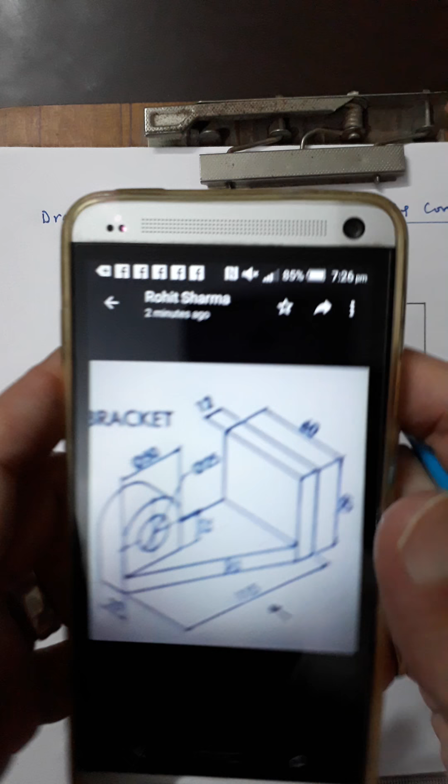So in the top view, you will see a 115 mm dimension. What is this height? This is 60 as well. So this is also 60, so 60 is the depth. Again, 60 by 115 you can draw.

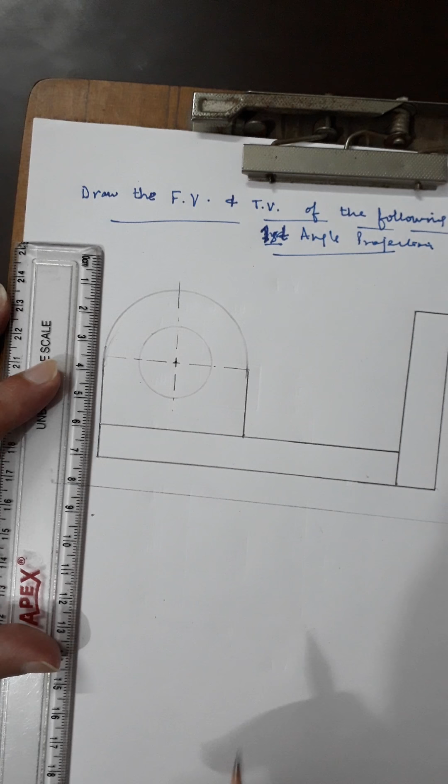Okay, first I will take the projectors throughout. I will draw the projector lines throughout, and yes, I will take 10 mm away from the XY as well.

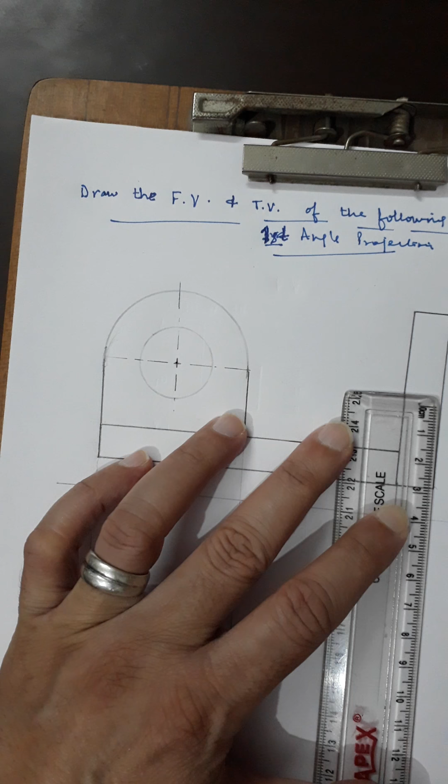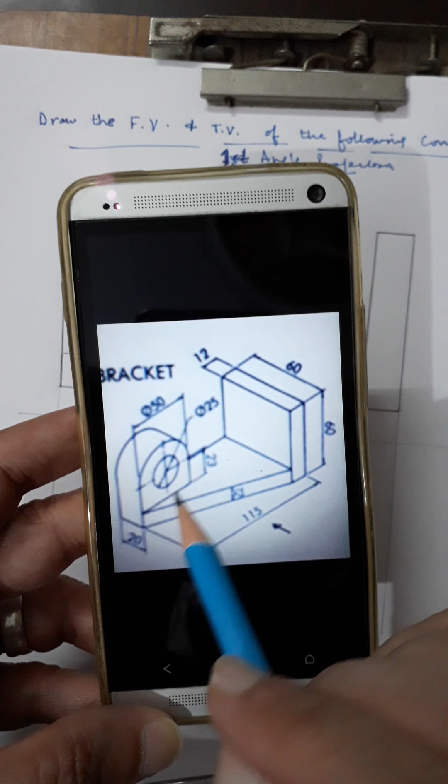Okay, so these are the projector lines. Yes, now you can see these are the vertical projectors. Now what will be there? You can see in the top view, this rectangle is visible, then this inclined wedge is there, then this circular hole is hidden and will be shown as dash lines.

Okay, and this slot will be visible. That is the outer diameter 50, visible. Now what will it be?

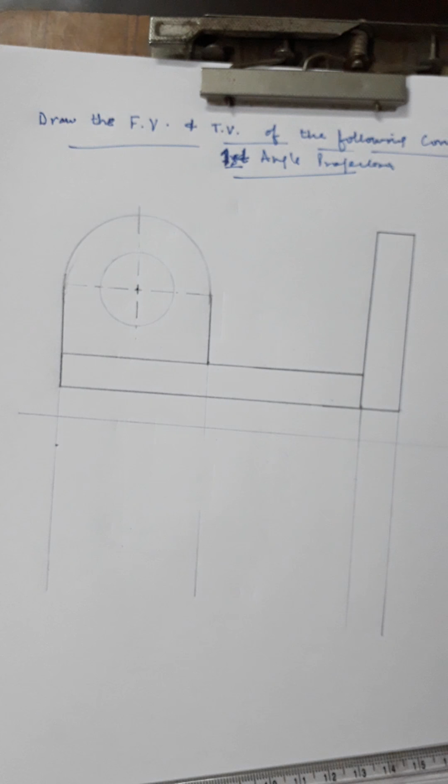Now I will first draw this, starting from here, the right side rectangle. It is 60 by 12. Okay, I will measure, first I will draw this.

Whatever it is, 115 is given, and you need not measure the length because you have already drawn this vertical projector, so need not measure it. And then it is 60 by 12, so you can mark it 60.

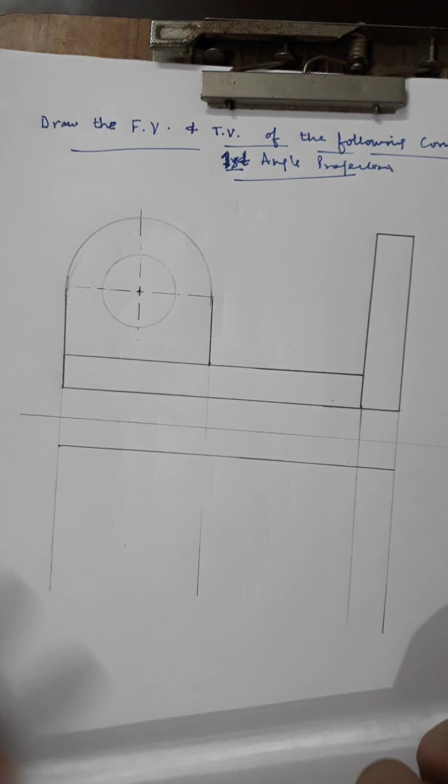This is 60, and this is 12 already there. So that is the benefit of drawing these vertical projectors - you need not measure the dimensions.

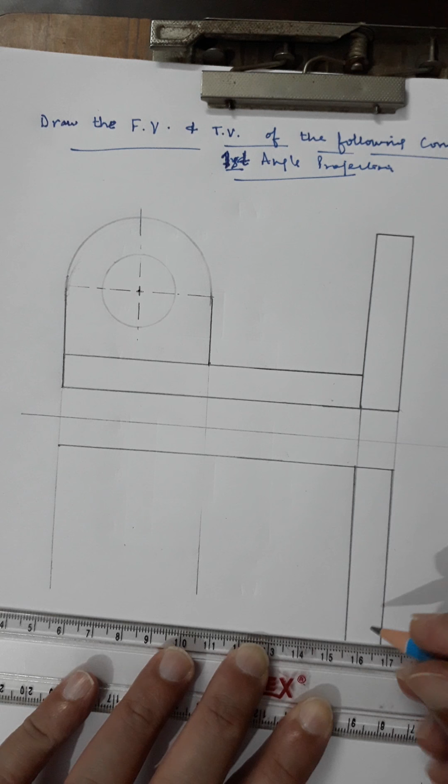Now you can join this, and now you come to this left side portion. You can see this is 20, it is 20 here. Okay, you can mark this 20, so it will be 20.

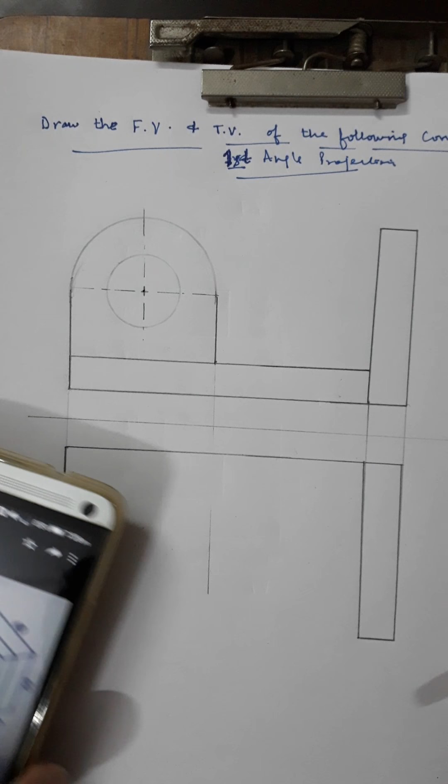Okay, and up to this 50, it will be a rectangle shape, this 50 from this left side corner, so it will be a rectangular shape, because in the top view the circle will be a rectangle, whereas in the front it is a circle.

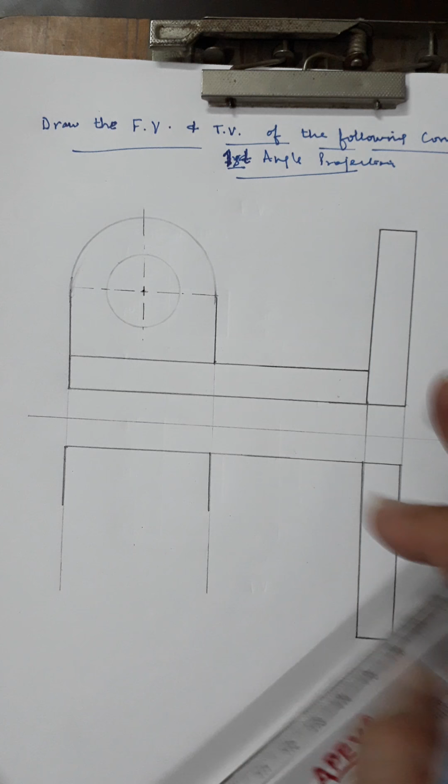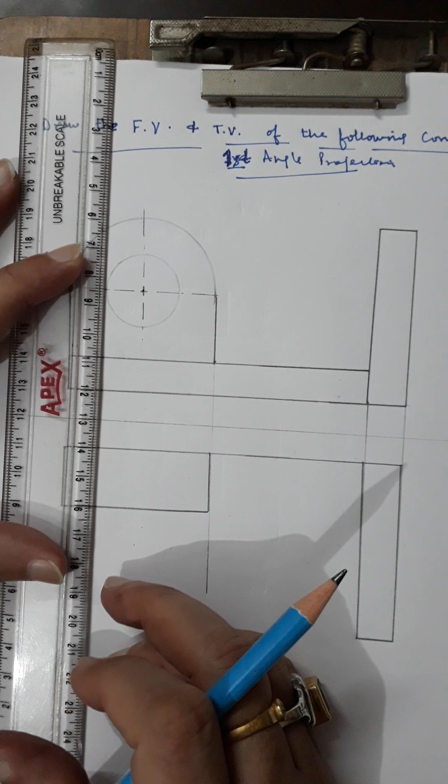Cylindrical shape is a rectangle in the top view now. So you can join this. Okay, so this will be visible, this slot circular, and the inside circle is not visible, that will be dash lines. Now it will be projected from here.

Okay, you can project it from here. Continuous thin lines, these are the projector lines. Now you can make it dash lines. Dash line is for hidden portion.

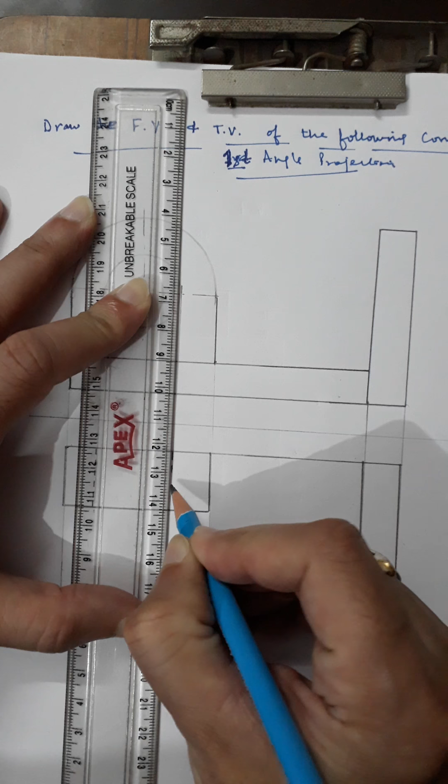And you can also extend this center line throughout, as a chain line. Okay, now what will happen? What is left now? You can see this inclined wedge.

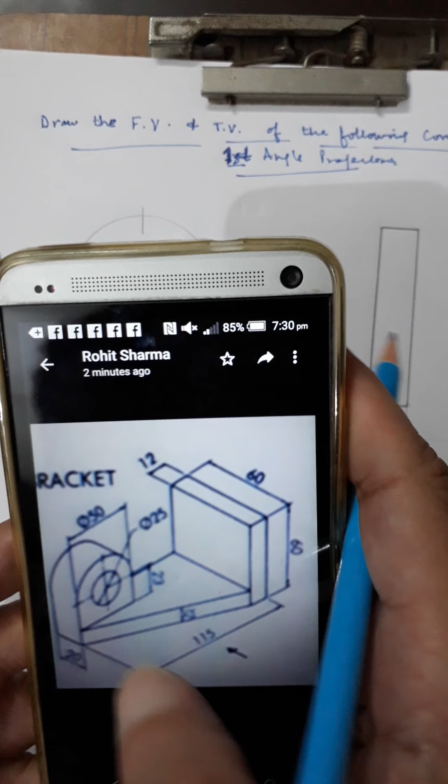So in the top view, it will simply be a line. You need to join this extreme left edge with this rectangle. So just joining this. I think this is complete.

Okay, so just in the top view it will be done. Now I will do the dimensioning. So now this is complete now.

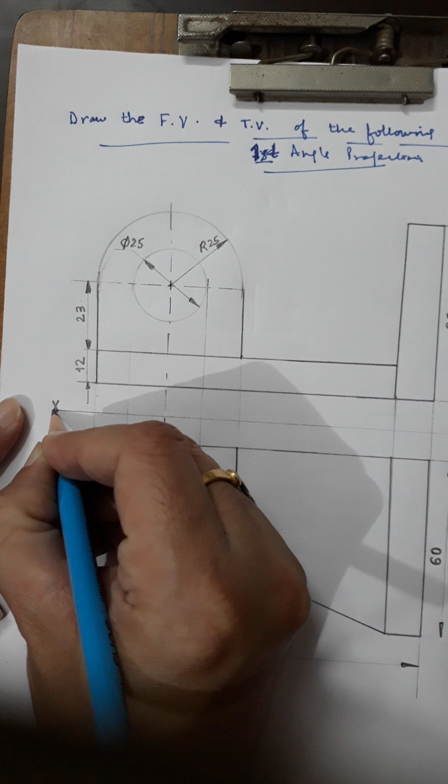I have done the dimensioning as per the aligned system, you can see. Okay, so this is complete now. Of course, you can add this X over here, and then Y on this side.

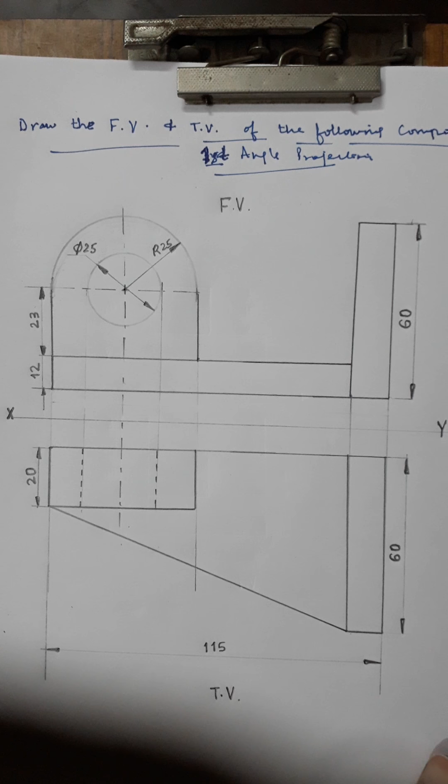Okay, XY is there, and then you can also mention this is the front view and this is the top view. Okay, so this is complete now. I hope you got it. Thank you.